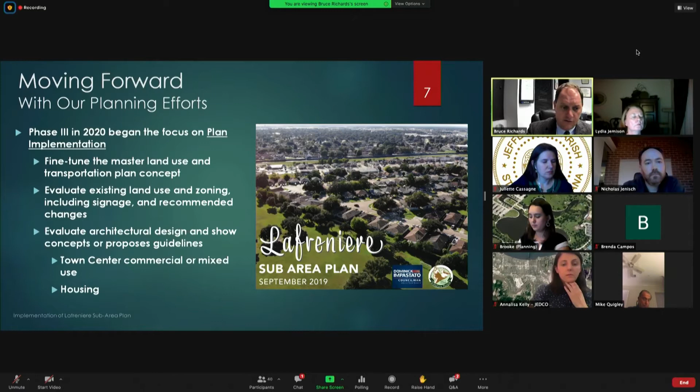Phase 3, which we're under now, began last year and focuses on plan implementation—how can we take these pretty pictures and ideas and turn them into reality? We were tasked with fine-tuning the master plan concept and transportation plan concept. We've evaluated existing land use and zoning, especially signage, and recommended changes. Nick and his group have evaluated architectural design and proposed guidelines, some of which you'll see tonight, covering both the town center commercial mixed-use area and the residential areas. Now we're going to give you a progress report on plan implementation—things underway and things recommended that we're moving toward.

The first of these dealt with developing the Soniat Greenway. As you can see in this picture, the Soniat Greenway is the green space between the Soniat Canal and the rear of the properties on the west side of David Drive. It's currently a power line right-of-way, but there's a lot of open, green ground space that can be used for recreation and access. This project is currently in preliminary design by the firm Digital Engineering. The parish has already applied for Transportation Alternatives Program, or TAP, funding from the state DOTD. Should the parish receive this funding, we'll move into final construction documents and design, which usually takes about a year to a year and a half. If full construction funding is available from the TAP grant and other sources, we can then advertise a construction bid and get this built.

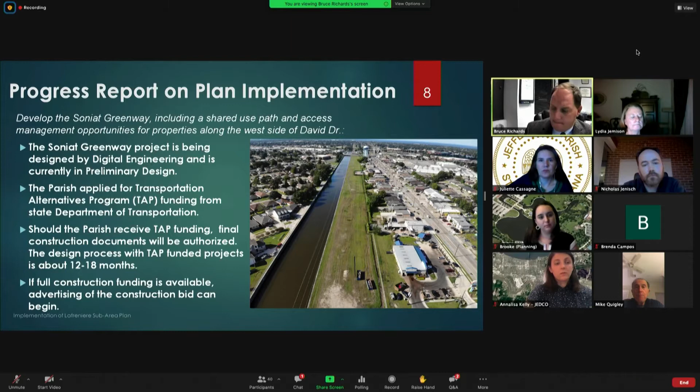Another big project is the improvement of David Drive, which is already underway, as you may have seen driving around. Back in 2015 and 2016, the project was funded through a parish tax measure and engineering design began. The design includes a median or neutral ground, landscaping where feasible, new subsurface drainage and other utility work, and a bicycle path. In 2018 and 2019, right-of-way was acquired and the task order for street lighting was issued. Last year the construction contract was awarded and construction began, scheduled to be complete by the end of this summer. With COVID things are a little iffy, but it's on track and underway, so we'll have a much more beautiful and efficient David Drive in the future.

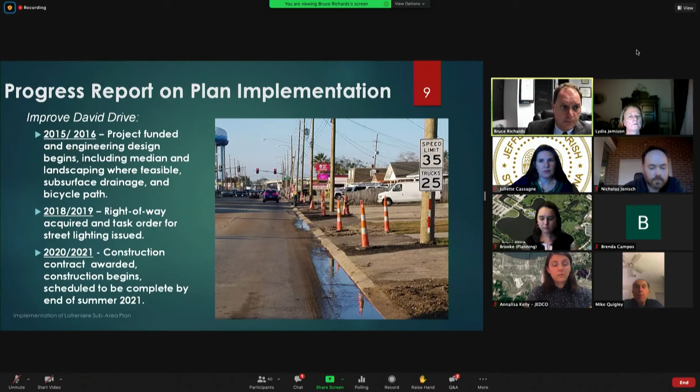Now I'm going to turn it over to Annalisa Kelly, Director of Strategic Initiatives with JEDCO, who's going to talk about the Restoration Tax Abatement Program that's been approved and developed by the parish. Annalisa, if you could take over.

Thank you, Bruce. Good evening, everyone. Annalisa Kelly here with JEDCO, the Jefferson Parish Economic Development Commission. We're the economic development arm of the parish, although we are a separate entity from parish government. We're here to help existing and prospective businesses find success, as well as other initiatives that help with the quality of life of the parish.

As Councilman Impastato mentioned at the top of this presentation, the Restoration Tax Abatement Program, or RTA program, is a state and local incentive that encourages improvements and renovations made to existing structures in specific eligible districts. The district in the Lafreniere area was recently created by the council.

So this area is eligible for this program.

The RTA program works through a property tax abatement, meaning if you make significant improvements to a property that include the exterior or facade of the building, your property taxes on those improvements will be abated for a 5-year period, with the potential for an additional 5-year renewal, totaling up to 10 years of tax abatement on those improvements. It's there to encourage investment, improvements, and renovations to buildings in certain districts, including this one.

So first off, plan changes. The only real plan change we're looking at is that in the plan itself, it recommended a new town center be developed off of Veterans, very close to the area centered between York Street, Trenton Street, Longwood, and Soniat Canal. Basically, we're looking at the area where the old Kmart was, the Magnolia Shopping Center. On the right-hand side you can see what was actually in the plan—how they envisioned it with a little town square and new streets going through the area. And you can see how it looks today, the existing old Kmart site, the Magnolia Shopping Center.

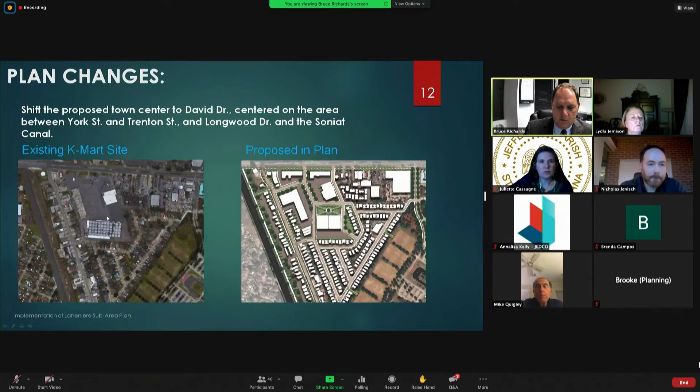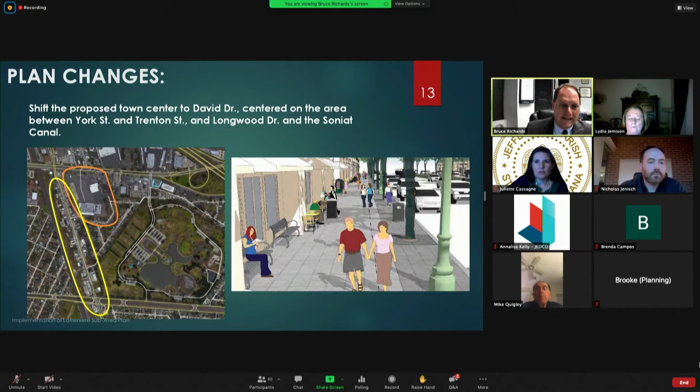We recommend a slight change to this after a lot of consideration with the parish and the task force, and for other reasons. We think it would be appropriate to shift the town center from that area, the Magnolia Center, over to David Drive itself. One reason that's in play is because David Drive is a smaller roadway, and it's getting ready to have a lot of physical improvement—there's going to be a greenway right behind it. It's just a better fit for a walkable, mixed-use kind of town center, the kind of thing you might envision in the picture on the right. So that would be an actual change to the plan itself—about the only major one we're looking at.

But now let's start looking at existing land use and zoning and talk about recommended zoning changes.

This is a map of Veterans Boulevard, the white strip on your north. Pretty much everything along Veterans is zoned C2, that's everything in red. There's one apartment complex hidden in there that's zoned R3 multifamily, but pretty much everything is zoned high intensity C2 commercial along Veterans Boulevard.

There are different uses. If you look at the outline colors, the orange is retail, and you can see the Magnolia Shopping Center, which is all small retail spaces. There are different types of things such as car dealerships, restaurants, gas stations, etc. But for the most part, this is a very high intensity kind of use along Veterans Boulevard.

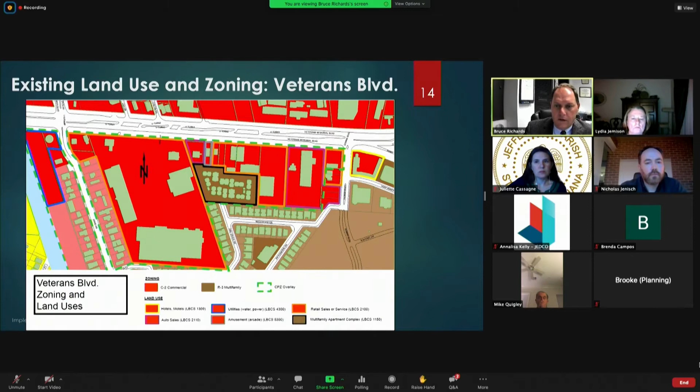What we'd like to do is keep that. We think we want to retain that high intensity C2 commercial. It does have a CPZ overlay, which provides for some nice landscaping. We feel this is consistent with the existing Veterans land use and zoning and the character of the corridor, and it promotes the reuse of that large Magnolia Shopping Center site that contains the old Kmart.

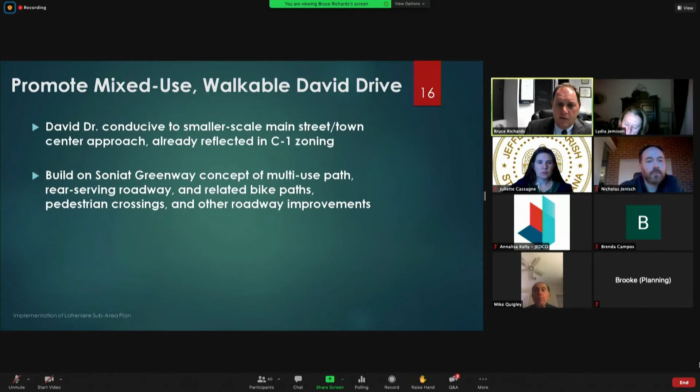Let's move on to David Drive. We would like to promote a mixed-use, walkable David Drive. We think it's conducive to a smaller scale, Main Street, town center approach. It's already reflected in the lower zoning classification of C1. It could also build on that Soniat Greenway, which is going to have a multi-use path, a rear-serving roadway or alleyway, bike paths, pedestrian crossings across the canal, and some other roadway improvements in the area, particularly David Drive.

Now, we think that this would best be accomplished by putting in a new zoning district. We're still working on this. It's called the Town Center Mixed Use District, or TCMU.

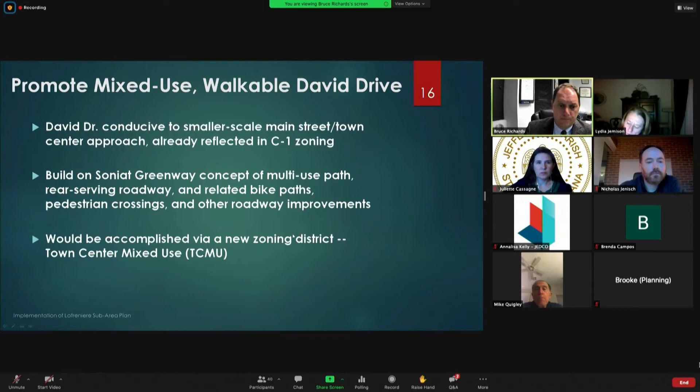Here's an idea just to show you how different things may look in different areas compared to how it's been built in the past and how we may look to build it in the future. The one on the left is David Drive at West Napoleon, the French Press coffee shop. Again, it's a nice site, very well done, with landscaping and sidewalks, but it's definitely more auto-oriented. It's got a large sign, so aesthetically it may not be as nice.

If you look over at Metairie Road on the right-hand side, a recent development is the Old Metairie Commons. This is more what we're thinking for David Drive. It's a little bit closer, definitely more of a walkable sense, right on a sidewalk, with the parking going towards the side and back. Most importantly, in addition to the commercial uses on the bottom, you have residential uses on the top two floors. As we all know, residential is a key thing in the parish, both affordable residential and just residential in general.

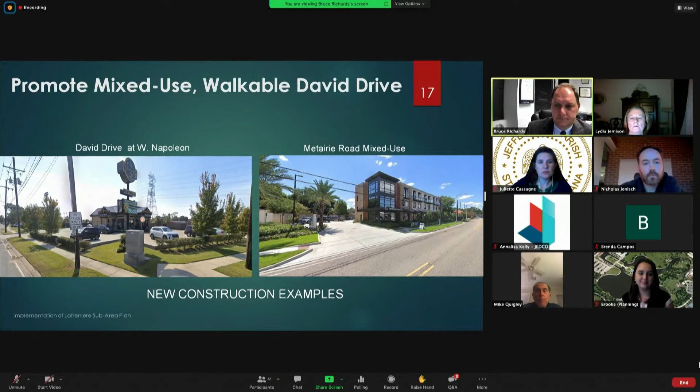So let's look at the existing standards of the current C1 district as it is on David Drive right now. Right now, any single, two-family, three-family, or four-family residential is prohibited. You can't build any more residential along David Drive. You could have some dwelling units in a mixed-use building, and multifamily residential is allowed only above ground floor non-residential. That's the current zoning.

Only low-intensity commercial uses are allowed. They're limited to 25,000 square feet of ground floor area for retail services, and if you just have offices, you can go up to 30,000.

Your front yard needs a minimum of 20 feet, just like in a residential district, and parking is allowed in that front 20 feet in front of the building.

Attached signs, which are signs on a building, are limited to 3 square feet per linear foot of building frontage, or 15% of elevation area. Now your detached signs, the ones out towards the curb, you can have pole signs, roof signs, monument signs—all that stuff's allowed.

Your building height is a 45-foot maximum, allowed automatically by right. If you build a building with multiple dwelling units, they can go up to 70 feet, subject to certain criteria. And finally, landscaping design standards.

Landscaping along streets, between uses, and other design standards are required only when a special overlay district applies, such as CPZ or CPZ PED. Currently, this area does have a CPZ overlay, so there is a little bit of landscaping required.

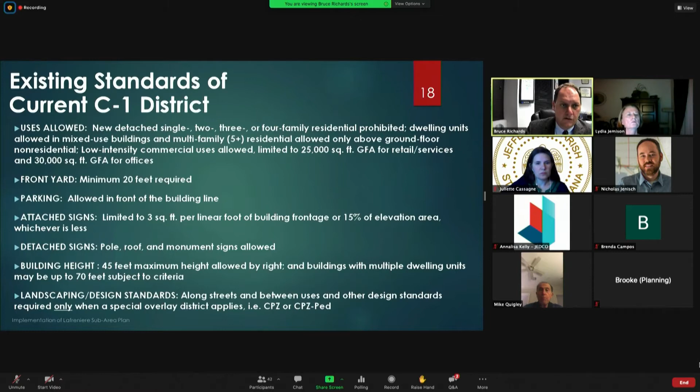Let's go on to the next one, the potential standards of a new TCMU district.

Now I'll try to compare it, give you the comparison as we go along.

First off, uses allowed. You can build a 2, 3, 4, 5-family detached residential in a TCMU district. You could build a duplex, a triplex, a fourplex. You could build attached townhouse dwellings. You can have retail, service, office uses, limited to 10,000,

12,500 square feet, and again you can build residential on top of commercial uses in a mixed-use district. Front yard, as opposed to currently, instead of a 20-foot minimum, this one would have a 10-foot maximum, and you could get an additional 5 foot under certain conditions. We're trying to bring the buildings a little closer to the street.

Parking, again, would not be allowed in front of the building line. It would be alongside or behind any new construction.

Attached signs - this is where we're going to try to get a little more restrictive. One flat sign, building flat signs, limited to about half what it is in the C1, 1.5 square feet as opposed to 3 per linear foot of building frontage. Now, you can also have additional signage allowed on your awnings or on hanging signs that are attached to the building.

Detached signs, your monument signs only, no more pole signs, maximum of 50 square feet. So you're thinking about 7 by 7, 5 by 10.

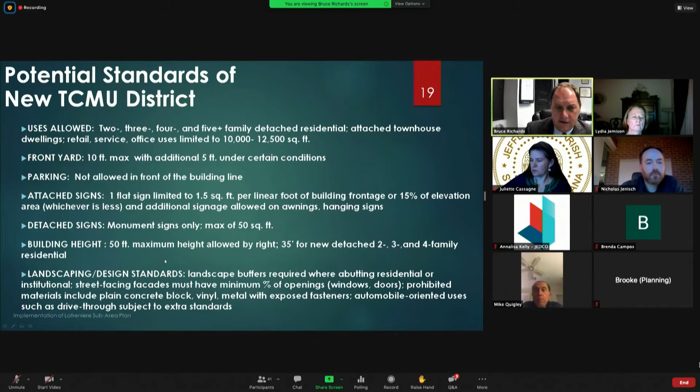This is where it's going to come into play as well. Landscape buffers would be required where you abut residential or institutional. Your street-facing fronts, your facades must have a minimum percentage of openings, windows and doors. We have some prohibited materials we're talking about - you can't have plain concrete block, can't have vinyl, can't have metal with exposed fasteners like a warehouse building. And your automobile-oriented uses, such as a drive-through, would be subject to extra standards.

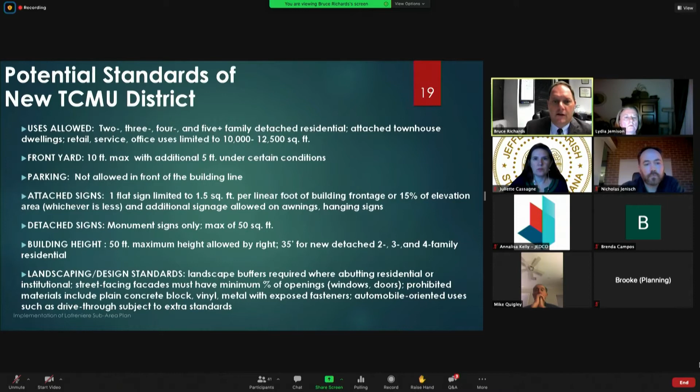So let's look at a map of how it is right now, the existing land use and zoning along David Drive. Veterans over here in this shot is on the left. David Drive comes all the way down to West Napoleon, which is on your right. Everything with the pink underlayment of zoning is C1. The red, again, is C2 over on Veterans Boulevard.

As you can see from the chart here, land use is the colors that outline each of the parcels. Most of the parcels in this area are outlined in black, which is retail sales and service, spread out all along the length of David Drive. But surprisingly, there's a lot of existing residential along David Drive in all different categories.

There's a single-family use right here. There's a few two-family uses, quite a few two-family uses. There's some triplexes, at least one in the area. There's a few fourplexes, and there's a multifamily residential apartment building right on the corner of York Street.

There's quite a few restaurants, of course - everything from Waffle House to Papa John's Pizza, Little Caesar's Pizza, Ground Patty, etc. And there's a couple of vacant lots. There's also a few healthcare and medical. So we've got a wide range of uses along David Drive.

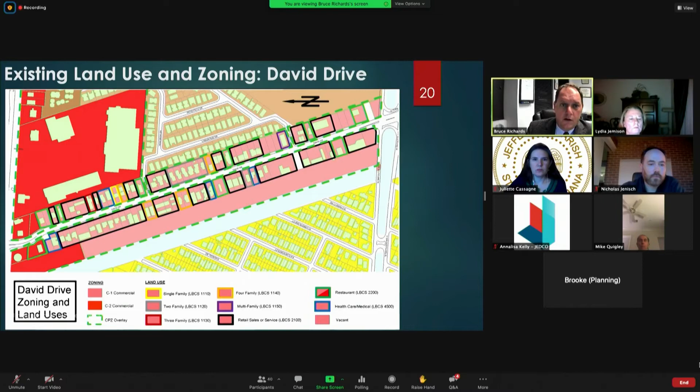Now, of course, if this is a walkable area, you're going to need pedestrian crossings. We'd put one at Trenton, one at York, and one at West Napoleon.

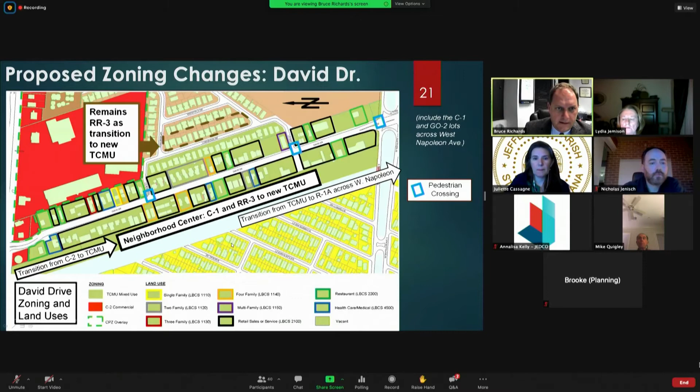All righty. All right then, I'm glad we're getting some feedback already. That's very good. Okay, now I will be turning it over to Nick Jenisch with the Tulane School of Architecture.

Nick has been working with us on more of the design side rather than the zoning side, and he's going to talk to you a little bit about some stuff. Nick? Thanks, Bruce. Again, Nick Jenisch, Tulane School of Architecture and Small Center for Collaborative Design. We've worked with the parish on a number of projects in Fat City and Terrytown, so we're happy to be working with Bruce and the team and the parish again here. Basically, we're just going to provide some visuals to play some of this stuff out.

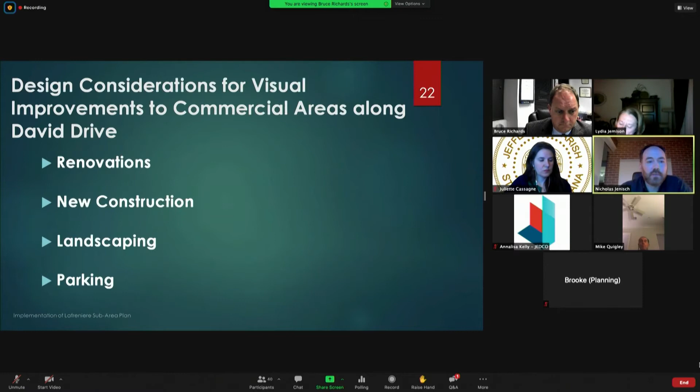So some of the design considerations for visual improvements, these are improvements that potentially could come with a zoning change and the added incentive of the tax abatement. We'll look at renovations, new construction, landscaping, parking, those types of things. This is a bit abstracted, but what you're looking at is actually some existing buildings on David Drive. What I wanted to point out is the existing pole signs that you can see in light red there. The buildings are set back.

The minimum setback is 20 feet under current zoning. So what you end up with is a little bit of visual clutter. You end up with a lot of cars parking in front, and rollover curbs, which disallow a lot of room for landscaping. That's the result of what the original zoning created in how these buildings were laid out.

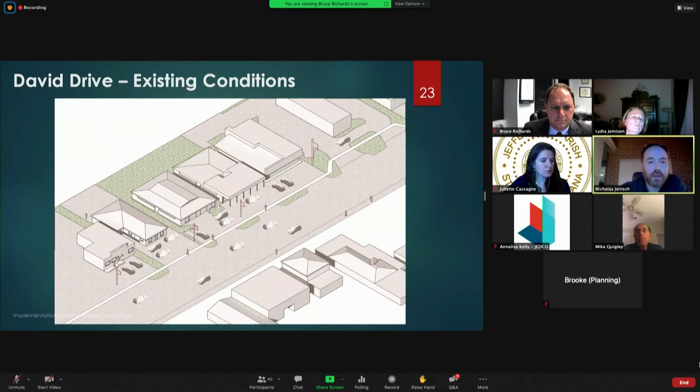If you go to the next slide, you can see in more detail what you gain when you park in the back: a much more visually appealing, pedestrian-friendly streetscape. You can have planters, landscaping, and outdoor dining for the restaurants there. As you can see, there's one example of a monument sign. So instead of these big pole signs meant more for highway-adjacent commercial properties, you get those lower monument signs that are still visible to traffic. Businesses want to be seen, but this way it's just more visually appealing.

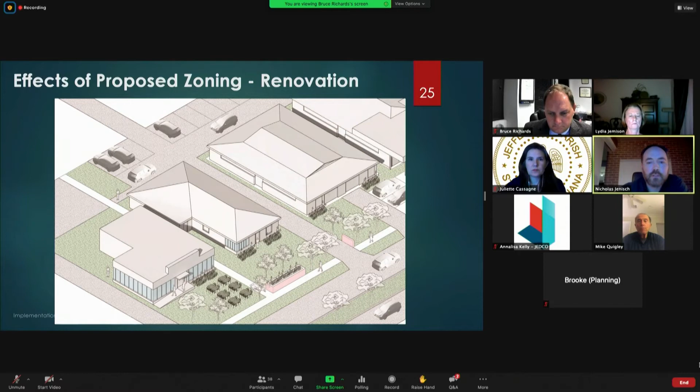If you go to the next slide, this gets a little bit into the square footage question too. Part of the idea of changing zoning is that things happen slowly over time. Not everyone's going to tear down their building and build a new one, but over time there are opportunities. Somebody might want to fully renovate their building, or someone might want to build on an empty lot.

So here we're just showing the difference between some of the existing buildings, which are still set back 20 feet or so, and right in the middle, what we're proposing as a new build and what that would look like. Just like the example Bruce showed in real life, the parking is in the back and on the side. You end up with a building much closer to the sidewalk, more pedestrian-friendly, with some spots for outdoor dining in front, and generally more engaging to pedestrians.

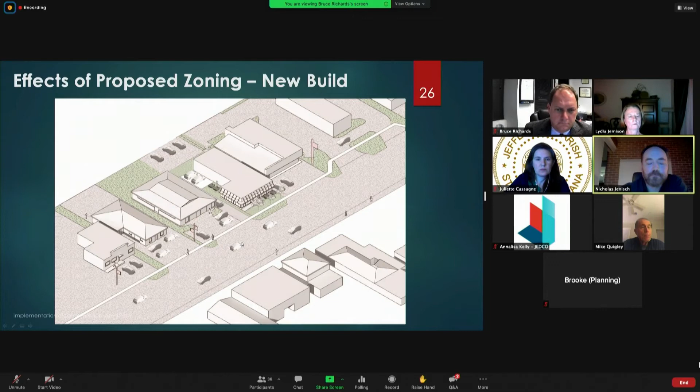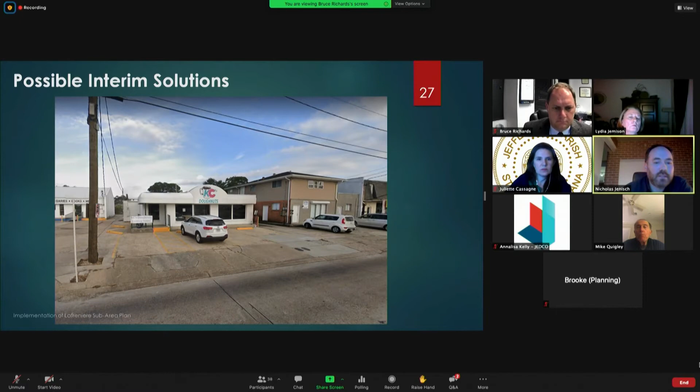Go to the next slide. This is a little bit more tactile - we just want to show you in real life the issue with lack of landscaping. It's difficult to do when you need to park in front of your building, so even in existing buildings that are mostly built out, we can't change things wholesale, but we can encourage things like the following slide, which helps delineate, using a tiny bit of landscaping where possible, between properties.

If you go to the next slide, you can see what it would look like with some visual improvements. Instead of a pole sign, you have a tree. You've still got visibility on the street because you've got a monument sign, and a little bit more landscaping where possible. You take some of that signage on the building itself away, and you still have as many parking spots as before, but it's very much visually improved.

So those are the ideas behind those zoning changes, and we just wanted to play those scenarios out so you'd be able to see them. By the way, these are the types of improvements that would be available and subject to the tax abatement strategy, so it's possible to do these improvements. Someone had a question about their taxes, I think on the residential side, but the improvements would not be taxed for that initial 5 years and potentially longer.

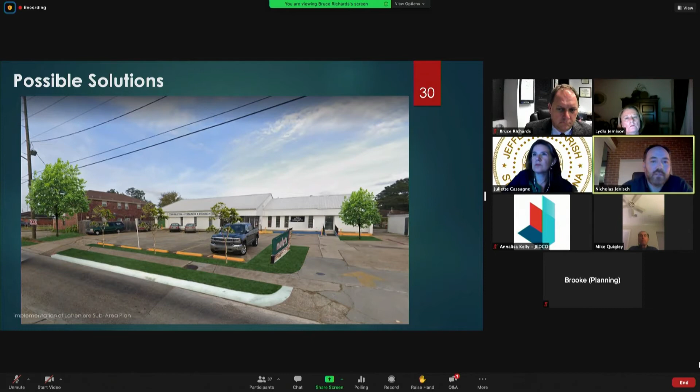Bruce, you're on mute. I sure was. Sorry about that.

Thanks, Nick. With that, we'll get into our second poll question about these zoning issues. Do you agree with a change in zoning along David Drive to create a more walkable built environment? This zoning would bring buildings closer to the street with parking on the side and rear, similar to recent developments on Metairie Road. Number 1 is strongly disagree, 2 is disagree, 3 is neutral/no opinion, 4 is agree, and 5 is strongly agree.

We look forward to you filling these out, and we'll get some instant poll feedback. While people are answering, I want to address two more issues about the potential town center mixed-use zoning district. One is that this would be a new base zoning district, just like the C1. We looked at the uses allowed in the C1, and most if not all of those uses would still be allowed in the town center mixed use, maintaining that mix of uses.

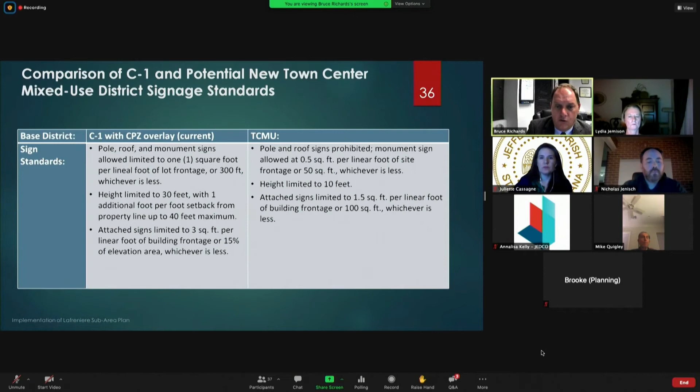Impacts to existing signs. We did some research on this, did a full analysis of all the signs that exist out there. We found that with proposed rezoning to TCMU, all the pole signs would become non-conforming, and 45 pole signs would be classified as non-conforming, and they are spread throughout the length of David Drive.

They're not focused in one area, they're all along David Drive. They could be easily replaced with monument signs. We wouldn't tell them they couldn't have any signs, they could replace it with a monument sign. Now, how would we actually address the signage if this was to come into effect as TCMU?

Yes, ma'am. Before we move on to discussing this action item for signage, I would like the participants in this meeting to know that you and your team did a full inventory of all of the signs along the David Drive corridor, not just pole signs, and that you have documented and done some rough calculations of all of the signs. I did want to make it clear to those listening that the sizes of signs we are proposing for the TCMU are actually in line with the size of signs that are out there on businesses today. Is that accurate to say?

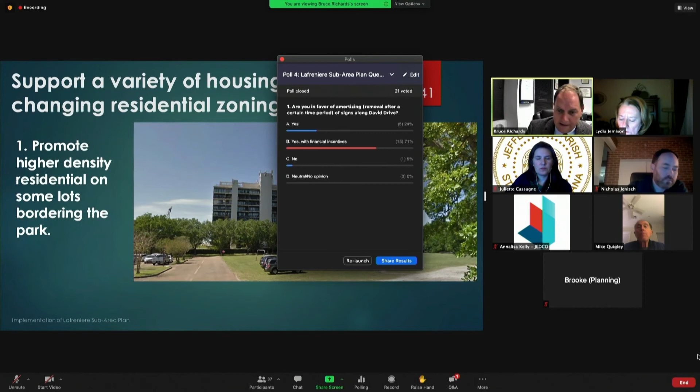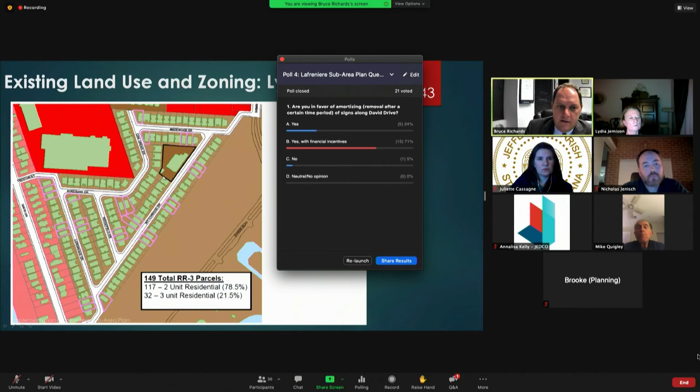So let's look at it on a map and go over what we're talking about. This is the area to the west, northwest of the park, called Linwood Park. It's kind of a hidden area, but most of it is comprised of doubles. The ones outlined in pink are the three-unit triplexes, scattered within the site. One big site in the middle, zoned R3, is the site of the old school, where they're now building a new apartment complex.

What we'd like to do is have that area on the western side of Longwood Drive be part of the new TCMU zoning classification, along with the lots on David Drive. But right across from where the new apartment complex, Lafreniere Living, currently under construction and four stories tall, sits, we would zone a small section that backs up to the park to R3 multifamily, which would allow a higher height. You'd probably have to consolidate or combine some of these lots to build such a structure, but this may let you do a taller building with views of the park.

At the same time, within the center, we would look to rezone that area from RR3 to R2. All the doubles and triples would remain, but this would enable people who own one of these doubles to convert it to a single family home if they wanted. This provides a full variety of housing types. The R2 allows both 1 and 2 family residential and facilitates conversion to singles, while R3 allows 2, 3, 4, 5+ family residential with greater density and height—50 feet automatically compared to 35 feet.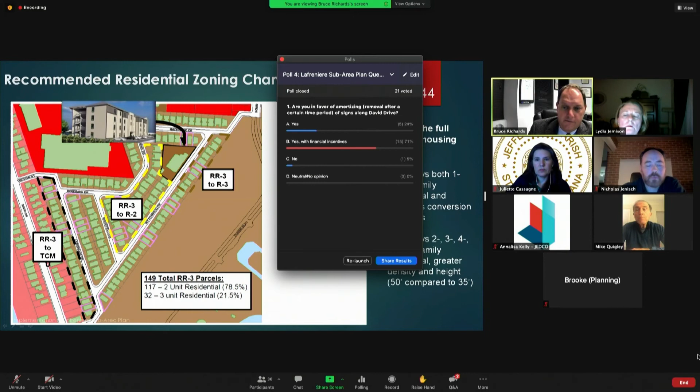So let's look over at Park Manor on the north side of the park. Here's a map of Park Manor. You can see most of these are doubles, the ones outlined in pink are triplexes, there are a few fourplexes in green, different apartment complexes in the area, the post office service facility here, and single family homes over on Judith.

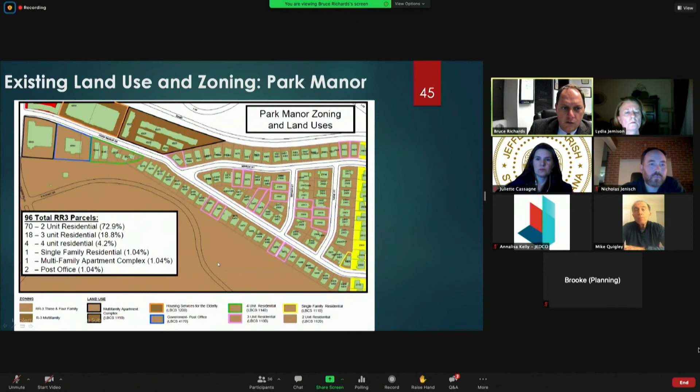What we're looking to do is say that along the south side, including this area, it would be zoned from RR3 to R3. This area overlooks the park and could facilitate conversion to higher density and higher buildings. However, over towards the eastern side of the neighborhood, which backs up to a single family neighborhood, we would convert this to R2, which would also enable conversion to singles.

I want to add, if you look in the lower right-hand corner, you'll see one lot outlined in yellow—that's the one currently a single family home, and the same rules apply. This gives you the full variety of housing types. The R2 rezoning allows both 1 and 2 family residential and facilitates conversion to singles, while R3 allows 2, 3, 4, and 5+ family residential with greater density and height—50 feet compared to 35.

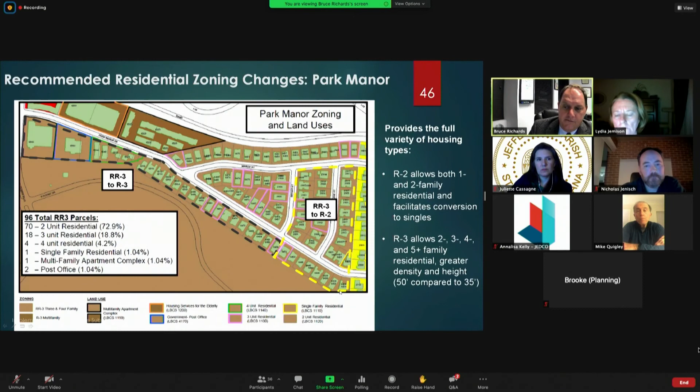So our last poll question of the night—we want to ask you about the residential rezoning I just presented. If we can get that final poll question up... There it is. Regarding the residential zoning recommendations within the study area, which do you support? A, you're in favor of all the proposed zoning recommendations. B, you're only in favor of changes that permit single family. C, you're only in favor of changes that permit higher density zoning. D, the zoning should remain as is. Or E, neutral, no opinion. So take a few seconds, think about it, and give us your response.

Again, this will be the last I'd like to bring up—we have a question from a person who owns a triplex in the area. Their question is, what will this do to taxes?

Does anybody with Jefferson Parish want to take that? I'll be honest, we can't anticipate what result this would have on your property taxes. Now, granted, if you make improvements to your property, or if overall property values in the area rise, that's a consequence of the overall property value rising. As far as your specific property, I don't think we can answer that. And as a reminder, if you were to make investments in your property, that's where the restoration tax abatement program comes into play—it helps you offset the investment you're making by allowing you to pay lower taxes than before you made the investment. So hopefully that addresses some of your questions, without knowing which specific property you're referring to.

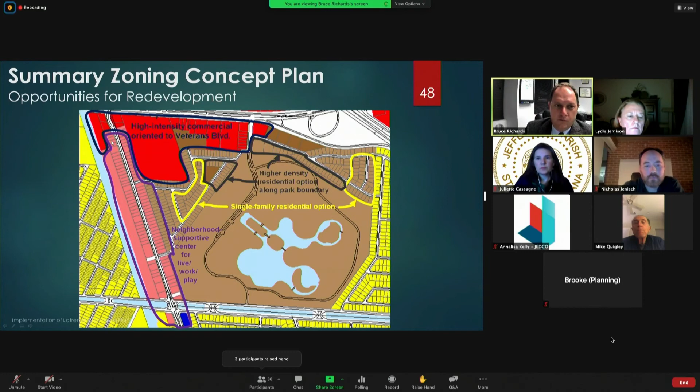Finally, we're going to jump back a little bit to the residential again, and I'm turning it over to Nick, who's going to talk about some visual improvements in the residential areas. Thanks, Bruce, I'll move quickly—I know we're in the second hour here. This is just a quick visual overview, so you can go to the next slide.

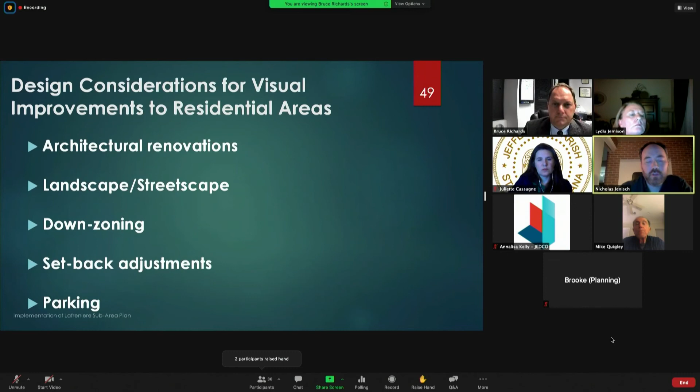This just came up in one of the comments: parking is a big issue. Visual clutter is a bunch of cars—there's a lot of parking not on sidewalks, but on the side of the road, over the curb, things like that. You can go to the next slide.

But plenty of positive elements—if you look through the neighborhood, there are plenty of beautiful homes, well-maintained, with good landscaping. Part of what we're talking about here is not just the architecture, but different scales of landscaping that provide some visual relief. A well-maintained exterior with small landscaping sometimes does the job; certainly bigger trees are helpful. You can go to the next slide.

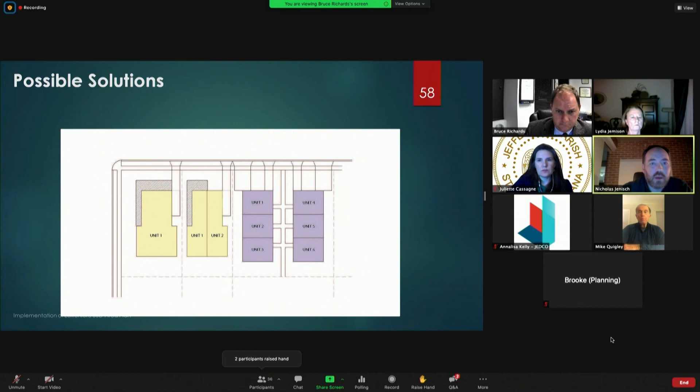Most of the properties have 2 driveways, some have 3 or even more, where the entire front yard is paved. We wanted to play out the scenario and show that if you allow street parking and create a permeable surface instead of the grassed area on the street side of the sidewalk, you can go to the next slide and see a little bit closer.

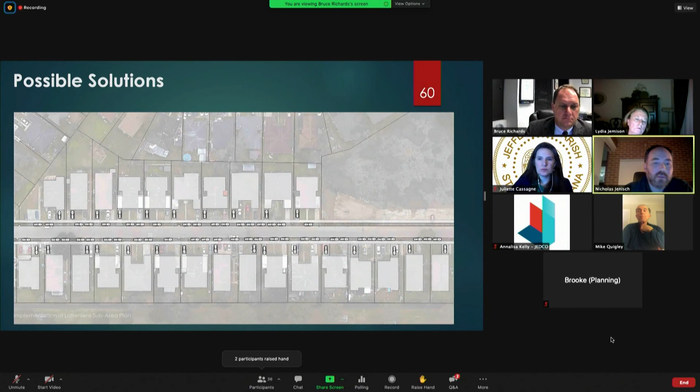So that strip becomes a parking area rather than having to pull over a curb and park there as people are already doing. You can allow it as a parking area, and you're parking right up next to the sidewalk, but it keeps cars off the front lawn. Someone commented about too many people living there, too many cars, code enforcement, all those sorts of things. That's certainly all true, but it is difficult to enforce. So sometimes through improvements like this, it's possible to help mitigate some of those issues where you're only parking one or so cars per unit, and then the other cars end up on the street.

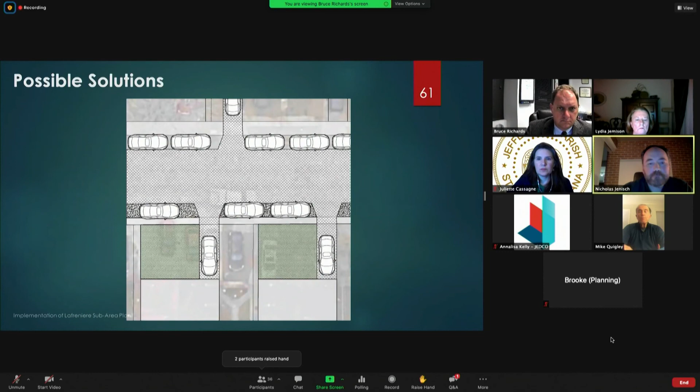So this is just playing that out visually. You can flip through these, Bruce. You can use planters and landscaping, simple additions, wood screen, just to update and hide the utilities, things like that. This would be considered kind of smaller scale renovation, although we recognize there's certainly a cost to it. You can go to the next one.

The idea of the single conversion also comes with the idea of a setback relaxation. This was introduced in Terrytown as well, where the 20-foot setback that's required is relaxed, and you allow it to go to 10 feet. And what that gives you is more square footage. So if you are doing a renovation, it may become worth it to you if you are able to gain that extra square footage.

Certainly less. Yep. If I may, I just want to address up front regarding the issue of relaxing a front yard setback. That is not something that we are proposing at this time under any recommended zoning changes. That's something we're exploring as an option, not just looking at here, but it's also something we had started talking about and looking at with regards to Terrytown. So if we were to look at making that a possibility or a regulation that we would put on the parish's books, it would be accompanied by some standards as to when and where it could be applied.